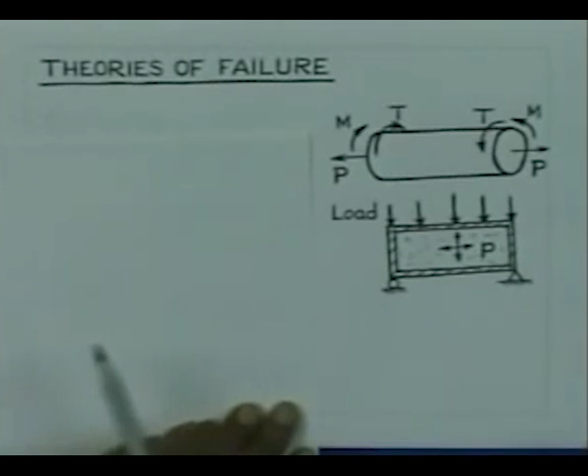It could be a shaft made out of some material, or it could be a pressure vessel made out of the same material. The shaft may be loaded by axial force, it may be also loaded by bending moment, torsion, and when these loads are acting, there will be some point in the material which is most critically loaded. The condition at which the material will fail is given by the theory of failure.

Similarly, in the second case, the pressure vessel is loaded by some internal pressure and it is also supported like a simply supported beam, and there are some transverse loading. Under the action of these, there is going to be a point in the body which is most critically loaded, and that critical condition will lead to failure of this component.

These theories help you to find out the load or the combination of load that will cause failure of the component. So, therefore, it is very important from the point of view of design. In the design of a component like this, you would be interested in finding out the combination of the axial load, bending moment and torsion which will cause failure of this component, so that you can guard against the failure by keeping the load level below those critical state.

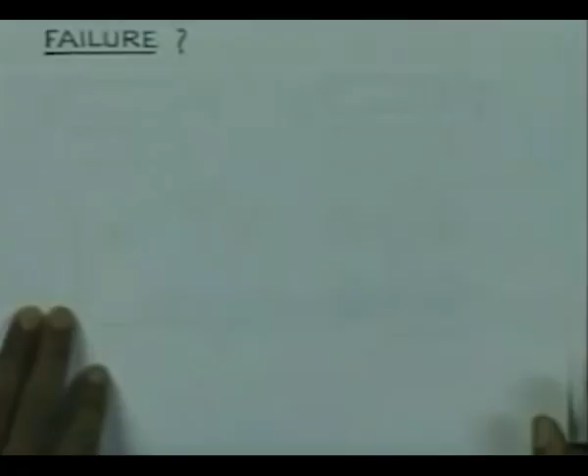Now, let us try to look into what is a failure. Think of a component which is loaded in tension. If the load is applied gradually, it may lead to a state when it will break into two parts. This could be a state of failure.

Think of another situation wherein we have a component which is loaded, and under the action of the loading, or as we increase the loading gradually, there is going to be more deformation. And suppose we have loaded it such that the plastic deformation occurs. On unloading, what you are going to find is that there will be some residual deformation.

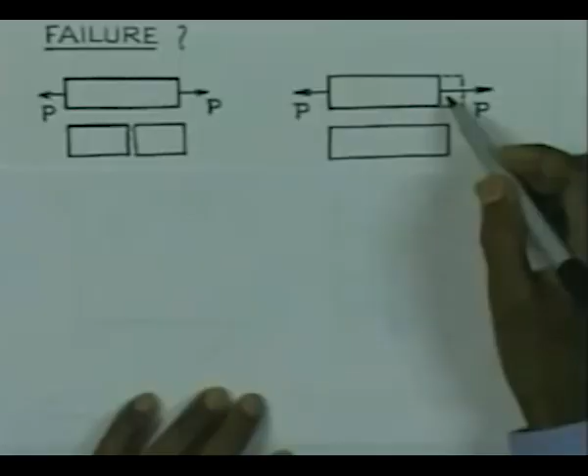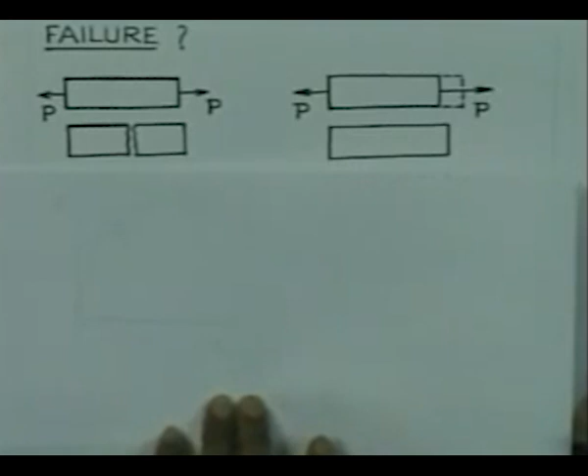So, look at this diagram again. You have this original length. So, after the removal of the load, the component has now got a length which is more than the original length. So, therefore, the component got permanently deformed.

This may be difficult, this may not be acceptable for some situations. Let me give one example here. Think of this case. Herein we have two shafts which are coupled together by means of a pair of gears. This is the pinion and this is the gear.

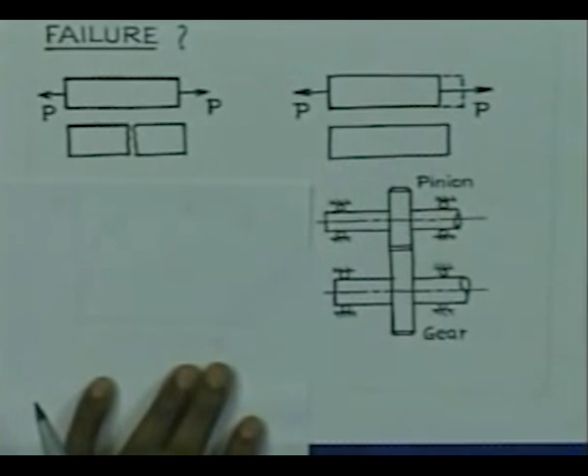While the shaft or the gears are transmitting power, there could be a situation that the radial loading, which tries to separate the two mating elements, if it is very high, there is a possibility that the axis of the shaft can get deformed.

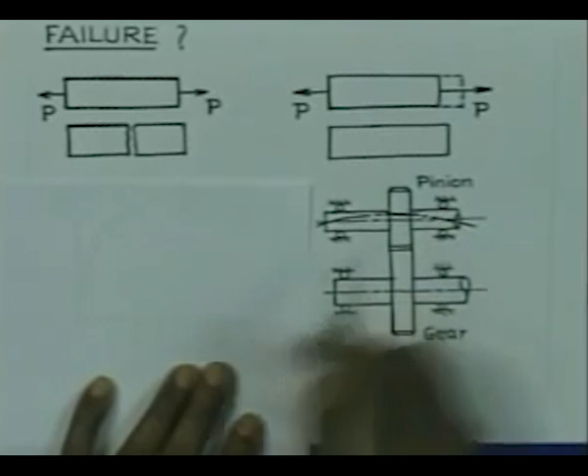For example, we find that after the load is removed, the axis of the shaft got deformed from the straight geometry to a geometry like this. So, therefore, now the mating of the pinion and the gear will not be perfect, and hence the subsequent operation will be noisy. So, this is not acceptable. So, therefore, we cannot allow in this case permanent deformation to take place.

In general, for the design of machines, we would like to guard against this condition. So, therefore, we would not permit any permanent deformation to take place in the component.

If you look into the tensile stress strain diagram of a material, typically you can think of plotting the engineering stress versus engineering strain. As you load, gradually the stress will vary linearly with the strain, and then after some time nonlinearity will set in.

Subsequently, we will have a point here which is the yield point, at which the material will try to deform permanently, and the load will increase with deformation up to the ultimate limit, and then it will finally lead to fracture at this point, which is the fracture stress.

So, the separation will take place corresponding to that stress, and in fact, there is this maximum stress which is the ultimate stress, that is the maximum stress that the component has withstood, and at this point itself the failure has initiated, and finally it fails into two components at this stress level.

So, therefore, we can take this to be the critical load for failure. So, this failure corresponds to this case.

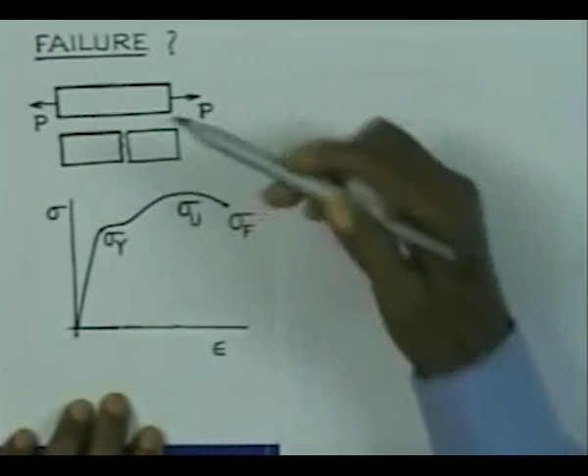But when we are trying to think of permanent deformation to be prevented, like the shaft example here, we are trying to refer to this point, that we will not allow the stress or the strain at this point to go beyond this point. So, for our discussion here, we would like to say that the failure of the material here will correspond to permanent deformation setting in, or the yielding of the material setting in.

Now, what is the utility of the theory of failures? Let us just try to look into this point.

The component that we were considering earlier, think of this component, herein it is subjected to axial load, bending moment and torsion.

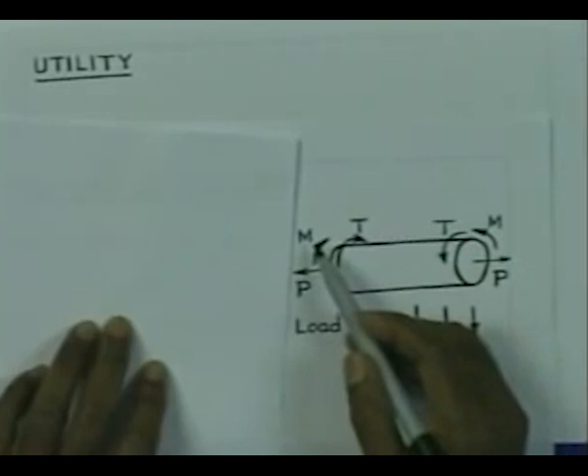If it is subjected to axial load, one would like to know what is the load that the component will withstand, given the cross sectional area and its dimension. Or one may be interested in finding out the bending moment given the dimensions, or what is the torque that can be withstood by the element given the dimensions.

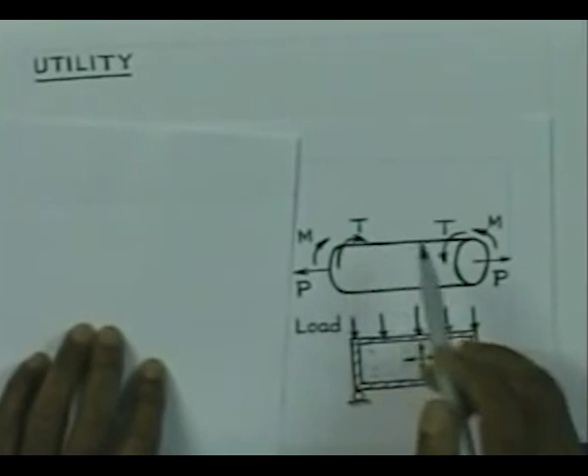Or it could be a situation wherein all the three are acting together, and we would be interested in what combination of the three will cause failure of the component or will initiate permanent deformation at the most critical point. So, therefore, these theories of failure, they help in finding out the load capacity of a component.

That load capacity can be referred to a single load, or it can be referred to a combination of loading.

There is also another point which is resolved by the theories of failures. I would like to show you this. When you try to pull a specimen in a tensile testing machine, particularly you have the experience when we test the mild steel specimen or aluminum specimen.

At the point of failure, that means when the component has got broken down into two pieces, there is a typical cup and cone fracture. So, I would like to show this.

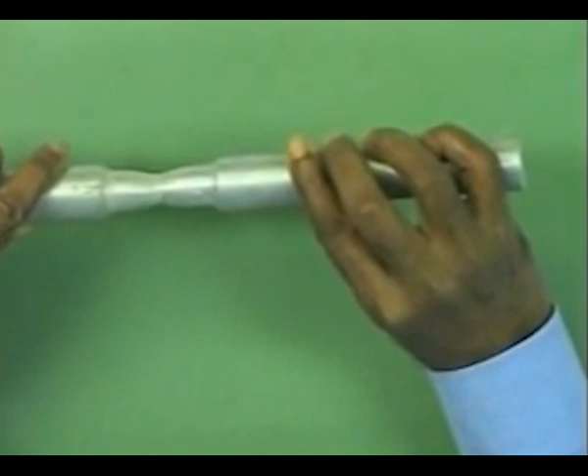Think of this specimen. This was the specimen which was tested in the tensile testing machine, and this was the gauge length of the specimen between this point and this point, and as we pulled it, it necked and then finally it failed into a typical cup and cone fracture.

You can see here that on this side you have the formation of the cup, and on this side you have the formation of the cone. In this case, the central portion has failed perpendicular to the direction of the loading, and the outer portion has failed at an angle of 45 degrees to the direction of loading. The question is, why does it happen that way?

Similarly, let us consider the example of a chalk.

If we take a piece of chalk and pull it, this has failed perpendicular to the loading direction and the cross section is flat after the failure. You can see that you can join the two sides together to get almost the original geometry. So in this case the chalk has failed in the cross sectional direction. This is the observation when you pull the chalk in tension.

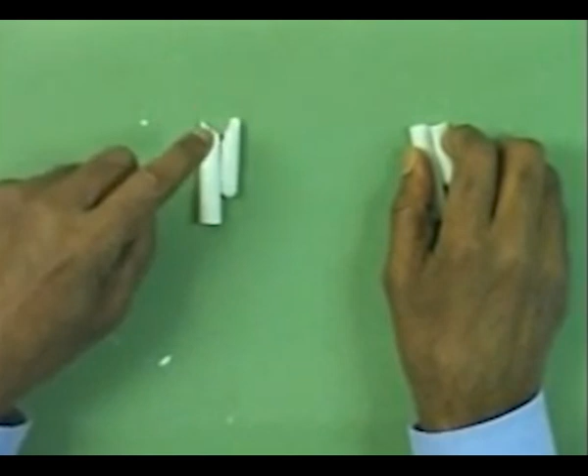Now let us consider another loading. We take the same chalk piece and we would now like to twist it. If I apply the twisting, you see that it has failed at a helix angle, it has failed in the helix direction, and this angle is 45 degrees. Now the chalk is made up of the same material. Under the action of the loading, we see a failure which is different from this failure which has resulted from application of the torque.

How can we explain this? Does it mean that the two loadings gave rise to two different failures? Physically they are different, but is there a commonness in the condition that existed in the two cases that has led to the failures? I would like to repeat this. We have tried to apply tension loading on the chalk and torsion loading on the chalk, and the failure in the two cases are different, but does that mean the condition at the root of the failure is different? That is the question. In fact, we would see that although the two loadings are different and the two failures are seemingly different, there is a condition which is same in both cases which has led to the failure.

So these theories of failure help us to find out the unity in the condition of failure in the two cases like this. And in fact, if there are multiplicity of loading, then also these theories of failure help us to find out the commonness of the condition of failure.

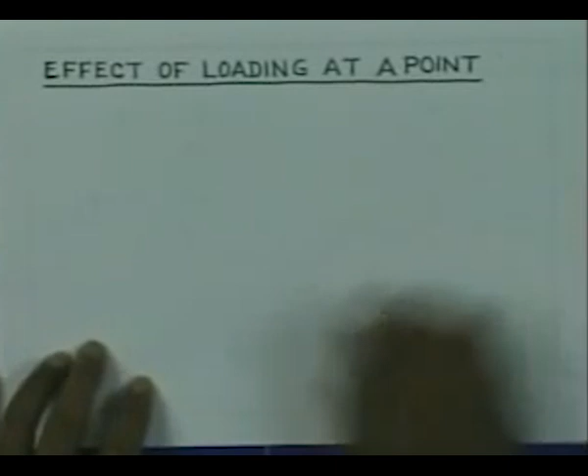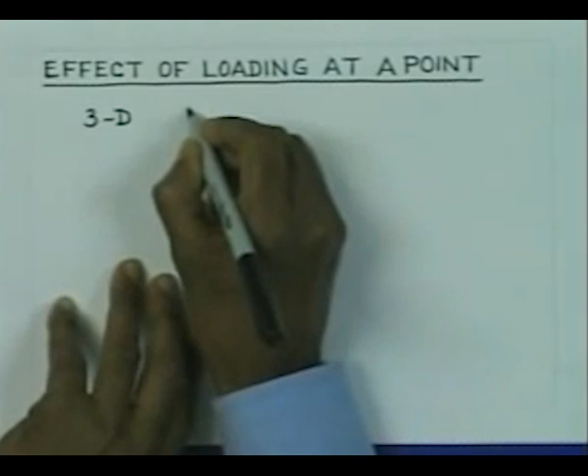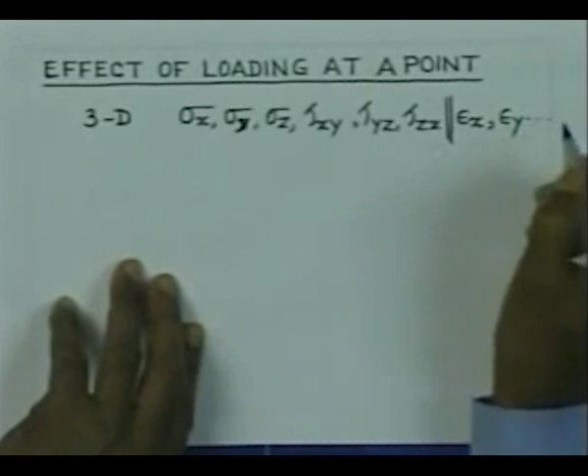If you consider a three dimensional situation, in 3D we can express the condition of state of loading at a point by the 6 components of stresses or 6 components of strain. So we can certainly express the condition of loading at a point by the 6 components of stresses. Alternatively, we can also express it by the 6 components of strain: epsilon x, epsilon y, and all the other components. The same state of stress or strain we can express in terms of the 3 principal stresses, and here we can give it by the 3 principal strains epsilon 1, epsilon 2, and epsilon 3.

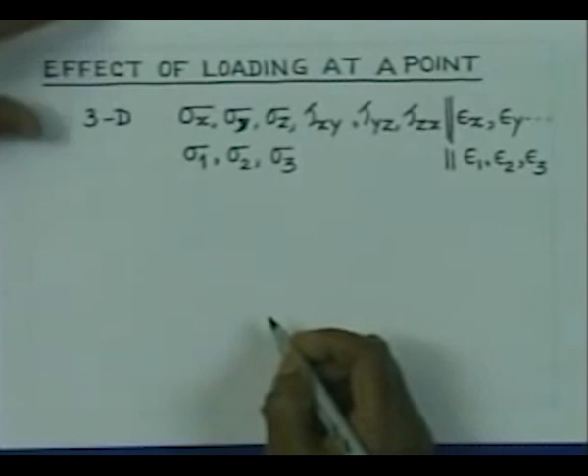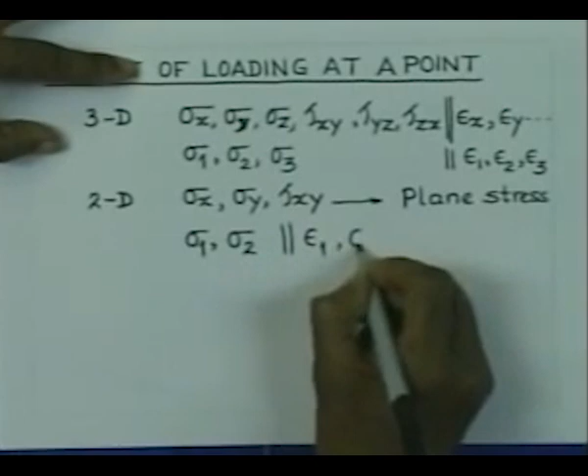In 2 dimensions we can give it in terms of sigma x, sigma y, and tau xy. I would rather confine my discussion here to plane stress. So for plane stress we will have these 3 components. Alternatively, we can express the condition of loading at a point by the 2 stresses or the strains epsilon 1, epsilon 2.

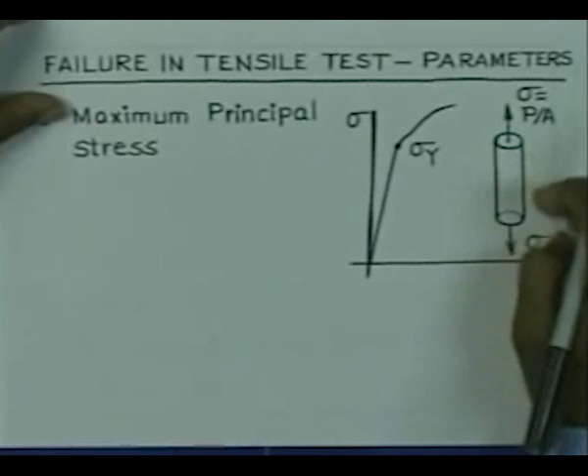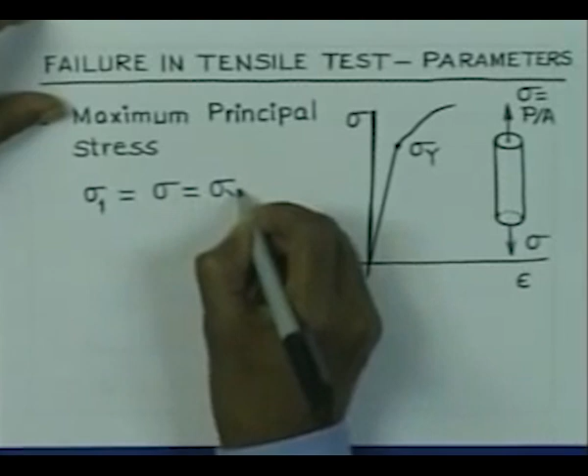Let us look into the failure of materials in tensile testing. If we consider the specimen to be loaded like this, and if we plot the stress strain, as I mentioned, this is how the stress will vary with strain, and at some point the material will demonstrate the yield stress. The condition of loading which corresponds to this point is nothing but a case of one dimensional loading, so only one stress is acting here. Therefore, the condition of failure at the point of yielding is sigma 1 equal to sigma, and that is equal to sigma y. That is the condition of failure here.

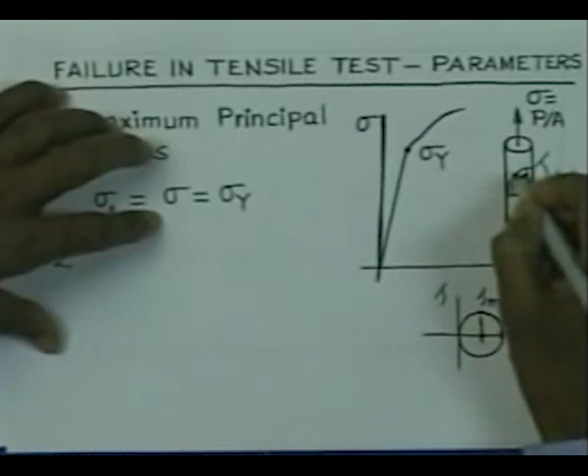If we try to consider the maximum shear stress which develops because of this loading, you remember that in the case of uniaxial loading, the maximum shear stress occurs on a 45-degree plane. So this is the plane which is at an angle of 45 degrees. On this plane there is a shear stress acting, that is the maximum shear stress. This follows from the Mohr circle diagram. If you draw the Mohr circle diagram, you have the shear stress in the y direction, normal stress in the x direction, and your stress here - let us say that is the yield stress. If we draw the Mohr circle, this is the Mohr circle for this case, and the maximum shear stress corresponds to this point, and that maximum shear stress is nothing but sigma y by 2, and it acts at an angle of 45 degrees to the uniaxial loading direction. So the maximum shear stress, tau maximum, is equal to sigma y by 2.

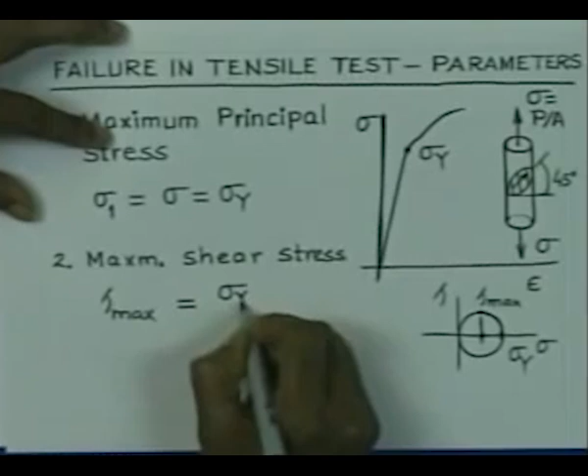Now, what is the principal strain in this case? Since there is only one directional loading or one stress present here, the maximum principal strain corresponding to this loading is nothing but sigma y by E, where E is the Young's modulus. Approximately consider that it is linear up to the yield point, so therefore maximum principal strain in this case is sigma y by E.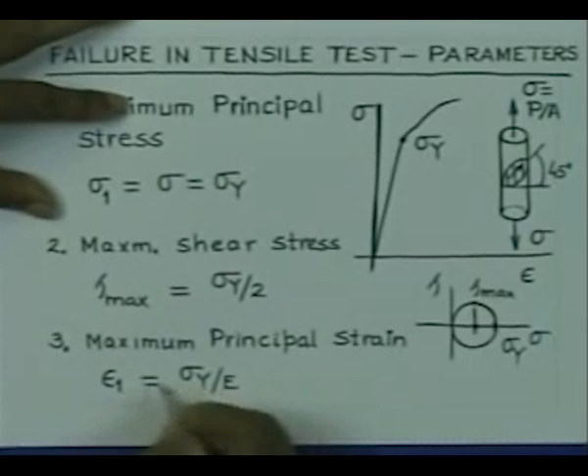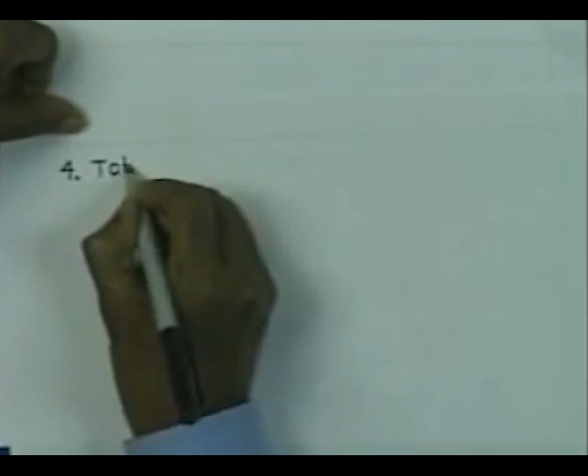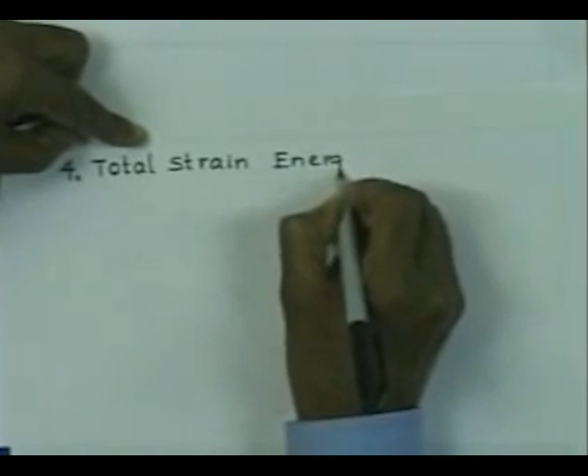At the same point of failure, if you calculate the total strain energy density, that is represented by S, is nothing but sigma y square by 2E. That is the energy per unit volume in the material at the yield point.

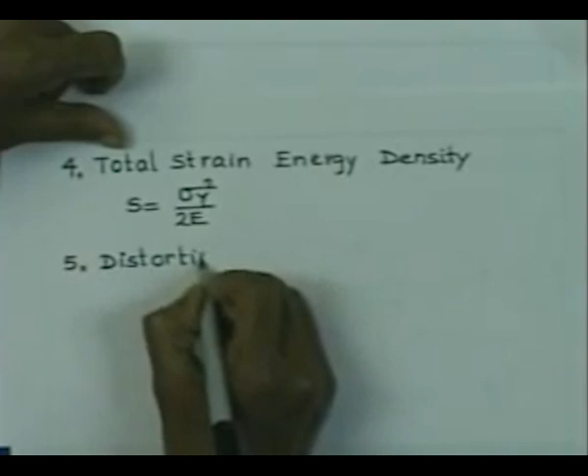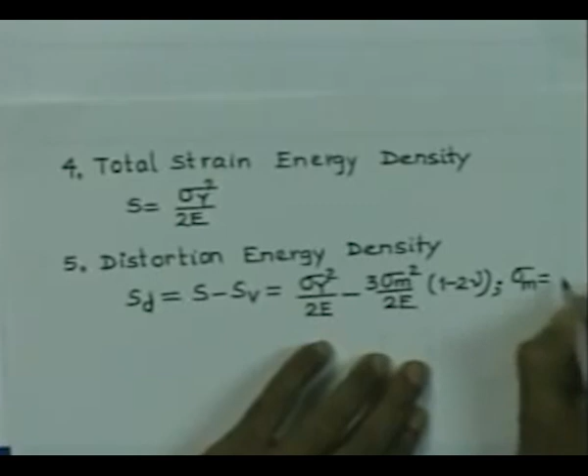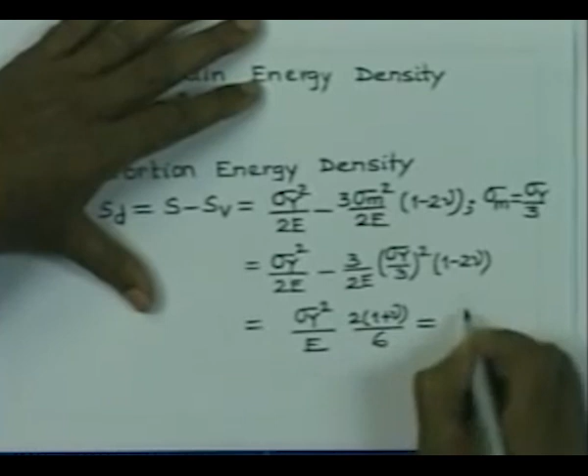If you calculate the distortion energy density, represented by SD, it is equal to total strain energy density minus the volumetric strain energy density. Total strain energy density is sigma y square by 2E, and the volumetric energy density is 3 times mean stress square divided by 2E multiplied by 1 minus 2 nu, where since it is uniaxial loading, the mean stress is the sum of the 3 stresses, which is sigma y, and mean stress is the average of that, so it is sigma y by 3. If we do the simplification, this is equal to sigma y square by E into 2 into 1 plus nu by 6, and that turns out to be sigma y square by 6G.

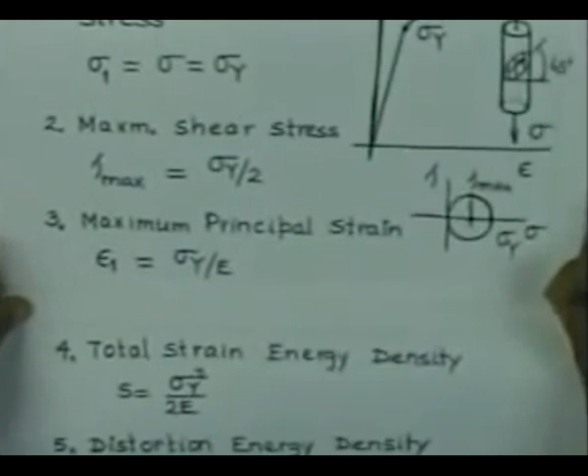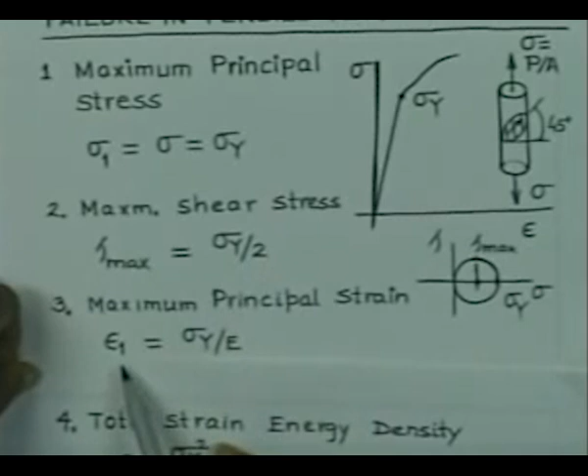So at the point of yield, what we have is that the material has a stress state given by sigma 1 equal to sigma y, maximum shear stress is sigma y by 2, maximum principal strain is sigma y by E, the total strain energy density is sigma y square by 2E, and the distortion energy density is sigma y square by 6G.

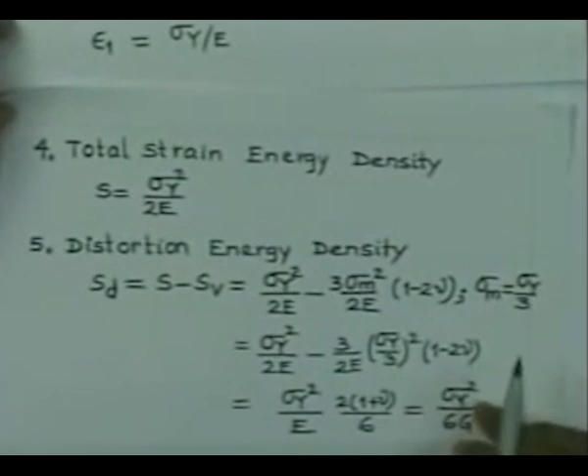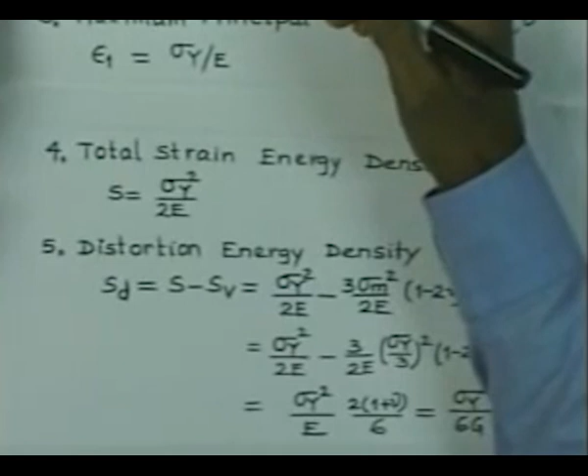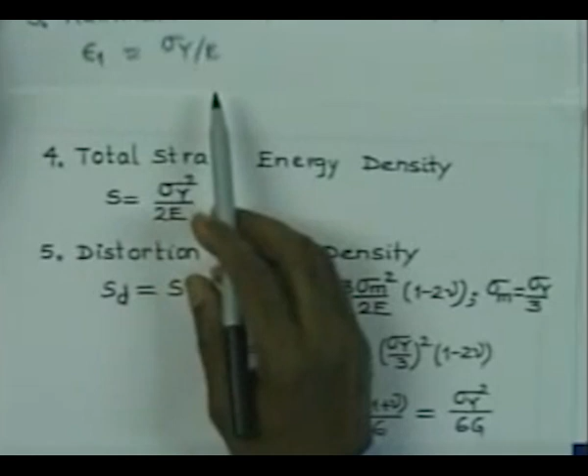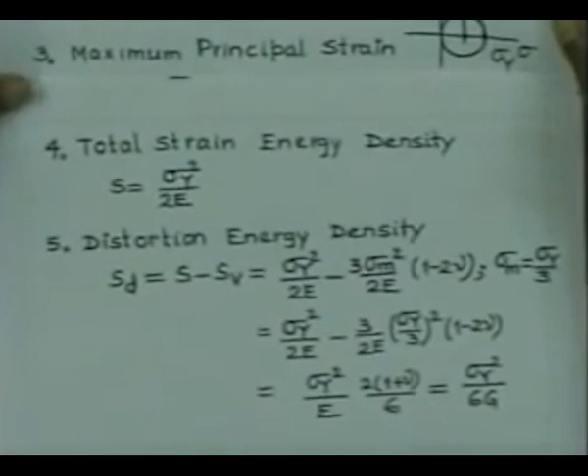Here one can say that the yielding of the material has been due to the attainment of the maximum principal stress level sigma y, or the maximum shear stress reaching the value sigma y by 2, the maximum principal strain reaching the value sigma y by E, the total energy density reaching the value sigma y square by 2E, or the distortion energy density reaching the value sigma y square by 6G. So therefore one can explain the yielding phenomena to be associated with either a critical level of stress, strain, or energy density, and this is the basis of different theories.

In fact, keeping these as the basis, there are 5 important theories of failure or criteria of failure. They are: maximum principal stress criterion, proposed by Rankine; maximum shear stress criterion, proposed by Tresca; maximum principal strain criterion, proposed by Saint Venant; maximum strain energy density criterion, due to Haigh, also associated with the name of Beltrami; and maximum distortion energy density criterion, due to von Mises, also associated with the name Huber and Hencky.

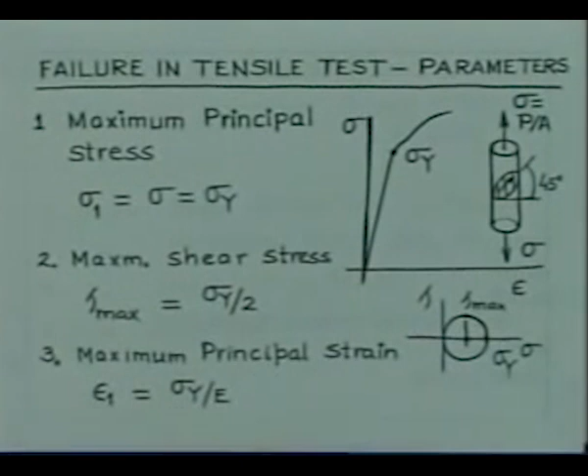Herein we would like to consider this criterion to be given by von Mises. Why is that? We have to consider this theory. There is also another issue I must stress upon here: if we have to find out the load capacity of a component under complex loading, for example, we would get back to our first example here.

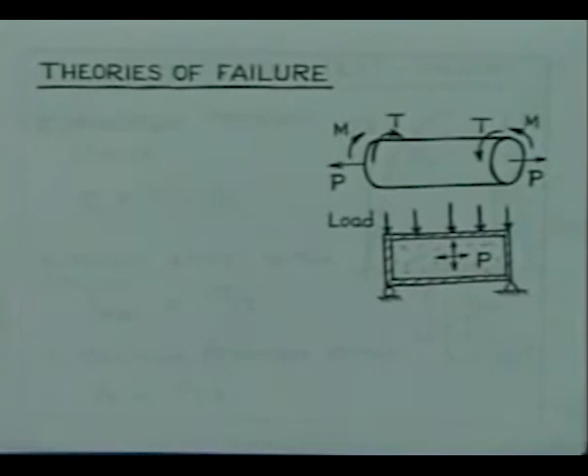So in this case, if we have to find out the axial load capacity alone, then we can do testing. Similarly, if we have to find out the bending capacity, we can do the testing by applying bending load. Similarly, if we are interested in finding out the torsion capacity, we can apply the torsion load and find out the load capacity. This means that if we have a component subjected to varieties of loading, in each case it will be necessary to do the test and find out the loading.

That is not really a rational way of going about it. On the other hand, if we can do one test, for example the tensile test, and find out the capacity of the material, and the observations from that test can be used to find out the bending load capacity or torsion load capacity, then that is a rational way of going about it. In fact, theories of failure do help us in achieving that. So we try to do a single test, collect the material data, and using that data find out the load capacity in new situations, without needing to test in each and every case.

Before we take up examples of these theories, let us brush up some of the relationships we derived in our initial stages.

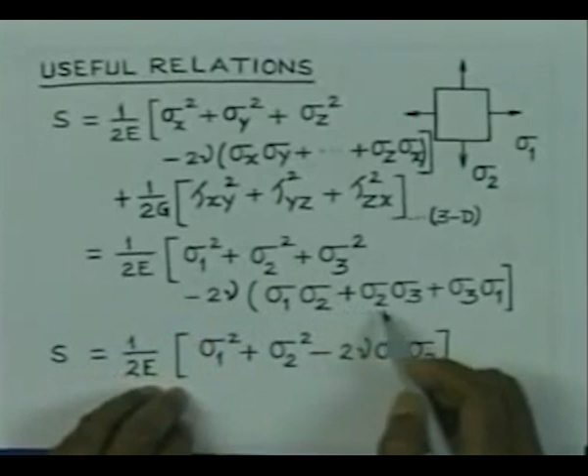For a 3-dimensional problem, the total strain energy density can be given in terms of the 6 stress tensor components: 1 by 2E times sigma x square plus sigma y square plus sigma z square, minus 2 nu times sigma x sigma y plus sigma y sigma z plus sigma z sigma x, plus 1 by 2G times tau xy square plus tau yz square plus tau zx square. If we write the same relationship in terms of principal stresses, it becomes simpler: 1 by 2E times sigma 1 square plus sigma 2 square plus sigma 3 square, minus 2 nu times sigma 1 sigma 2 plus sigma 2 sigma 3 plus sigma 3 sigma 1.

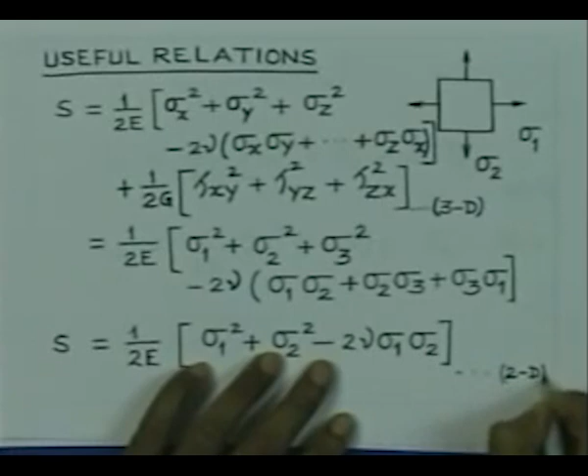In the case of 2 dimensions, we will have sigma 3 equal to 0, so the total strain energy density becomes 1 by 2E times sigma 1 square plus sigma 2 square, minus 2 nu sigma 1 sigma 2. I would again emphasize that in my discussion I confine to plane stress condition; we are not talking about plane strain, where a third stress component can be present.

Similarly, the distortion energy density is given by 1 by 12G times sigma 1 minus sigma 2 whole square plus sigma 2 minus sigma 3 whole square plus sigma 3 minus sigma 1 whole square, for 3 dimensions. The same expression for 2 dimensions is 1 by 6G times sigma 1 square plus sigma 2 square minus sigma 1 sigma 2. The volumetric strain energy density is given by 3 by 2E times sigma m square into 1 minus 2 nu, where sigma m is the average of the 3 normal stress components.

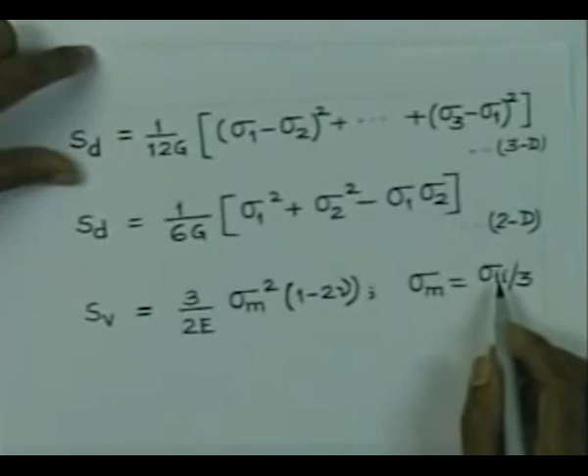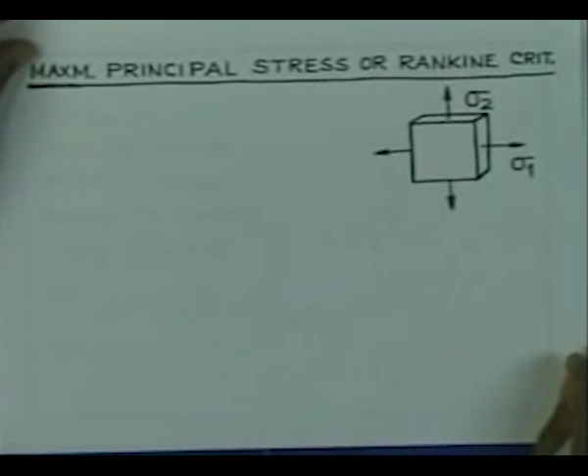Let us consider the maximum principal stress, or Rankine criterion. We consider the situation to be plane stress. If we consider the most critically loaded point in a component, let us represent the stress state as sigma 1 and sigma 2 acting in the two orthogonal directions.

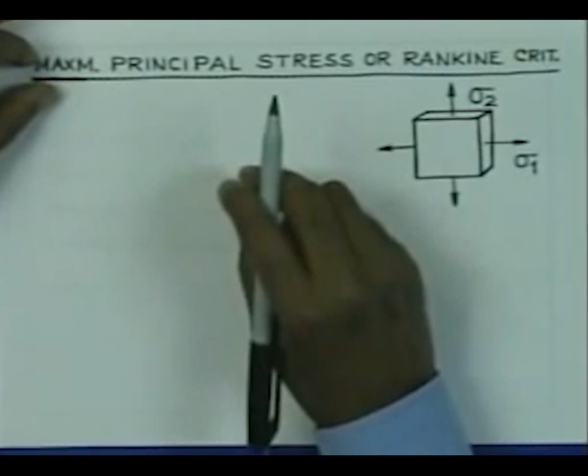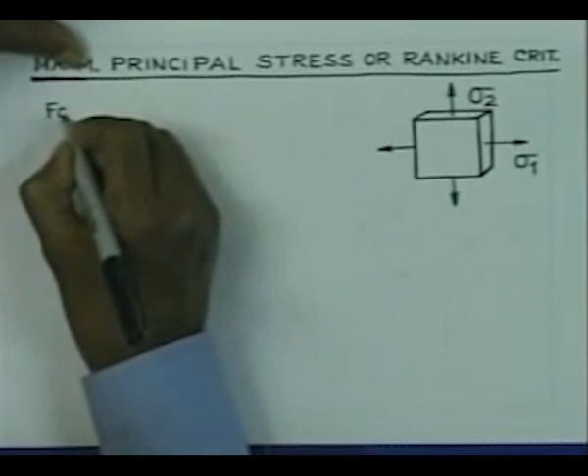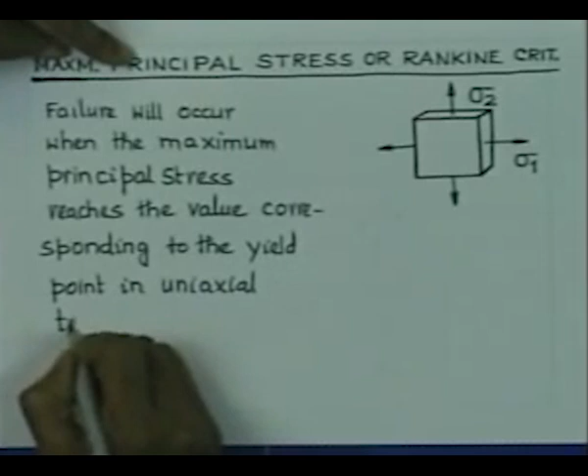According to this criterion, failure will occur when the maximum principal stress reaches the corresponding value in uniaxial tension, that is, when the maximum stress reaches the value corresponding to the yield point in uniaxial tension.

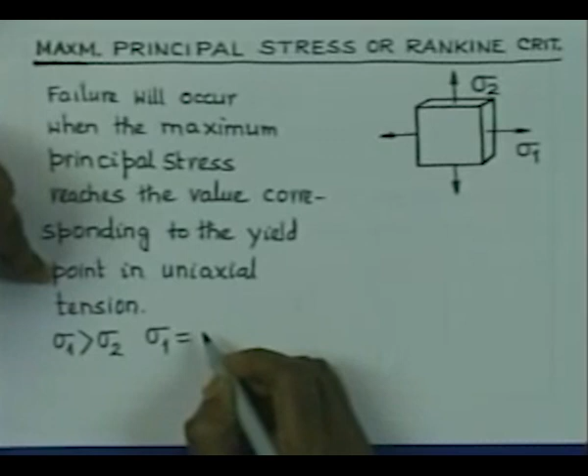Let us now consider that sigma 1 is greater than sigma 2. This means that failure will take place when sigma 1 is equal to the corresponding value in the uniaxial test at yield point. We know that the corresponding stress at yield point in uniaxial tensile test is sigma y, so this is the condition of failure.

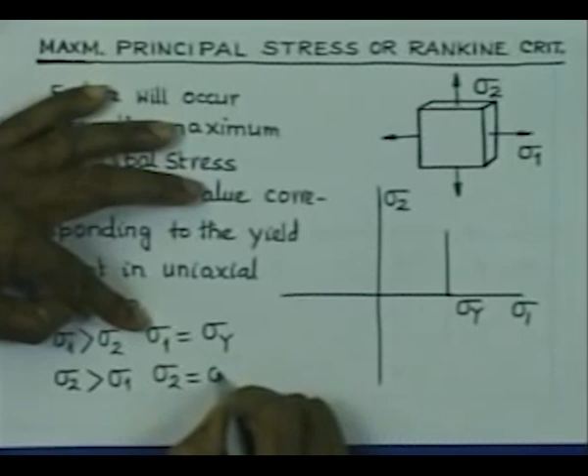Suppose sigma 2 is the larger stress than sigma 1, then failure will occur when sigma 2 is equal to sigma y. Since sigma 2 is larger, we again have failure here when sigma 2 equals sigma y. So this line gives the combination of sigma 1 and sigma 2 which will correspond to failure.

That means the stresses which are lying within this boundary are all safe combinations. So we can write that the stresses lying within this zone are all safe. So this is the safe zone, and the stresses which are outside this boundary correspond to the failure zone. The portion of the boundary which separates the safe zone from the failure zone is known as the failure locus.

Generally, we consider the property of the material to be the same in tension and compression. Therefore, we can now also find out the safe zone and the failure zone in the compressive region, and it is going to be without any difficulty that we can find this out.

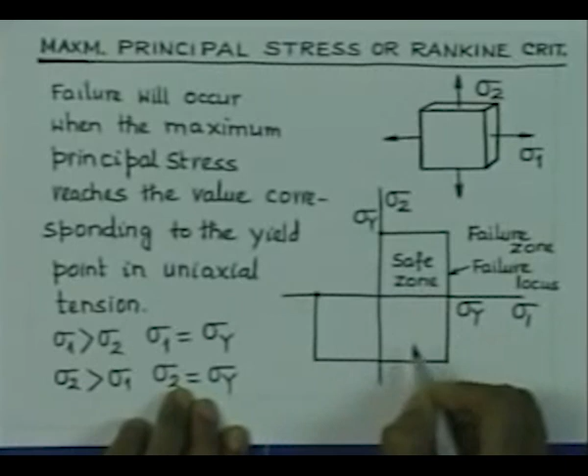If one of the stresses is positive and the other is negative, again we will have the zone given by these two lines, and in the other quadrant also the zone is going to be given by this line. So the total space in 2 dimensions corresponding to the safe zone is nothing but this.

So these are the stresses which correspond to safety, and the stresses outside this correspond to failure. So this is sigma y, this is sigma y, and of course this is compressive sigma y. So this is how the failure zone can be found out making use of the maximum principal stress criterion, or Rankine criterion.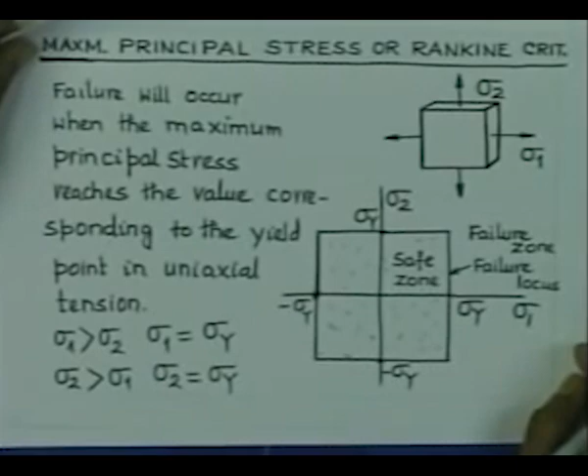Now we will like to consider the maximum shear stress, or Tresca criterion. According to this criterion, the failure will occur when the maximum shear stress in the material reaches the value corresponding to the value at the yield point in a uniaxial tension test.

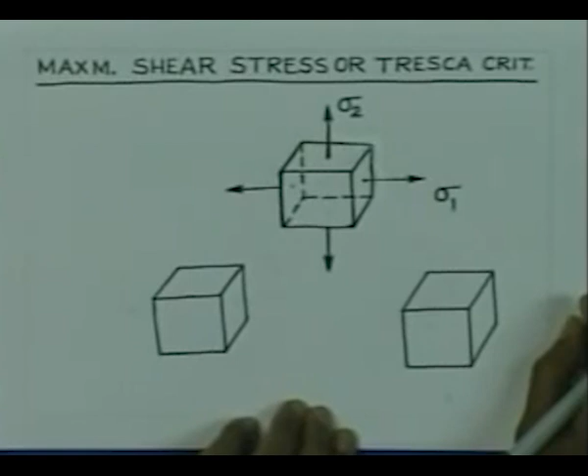Before we go into giving the theory, let us consider some points here. Think of this element which is loaded by biaxial loading, sigma 1 and sigma 2. If we find out the maximum shear stress, that shear stress is going to occur on this 45-degree plane. This is one 45-degree plane, and the other 45-degree plane is given by joining this with this edge, so it is this one, if it is a perfect square.

So this is the maximum shear stress plane, and the magnitude of the shear stress is nothing but sigma 1 minus sigma 2 by 2, provided sigma 1 is greater than sigma 2, and it can also be given by sigma 2 minus sigma 1 by 2, provided sigma 2 is greater than sigma 1.

Let us now consider a situation here. We have sigma 1 acting in this direction, sigma 2 acting in that direction, and in the third direction, if you consider this as your x direction and this as the y direction, in the z direction the stress is 0. What I mean is that in this direction we have the stress sigma 1 acting, and the stress in this direction, which is sigma 3, is 0 because we are considering the plane stress condition.

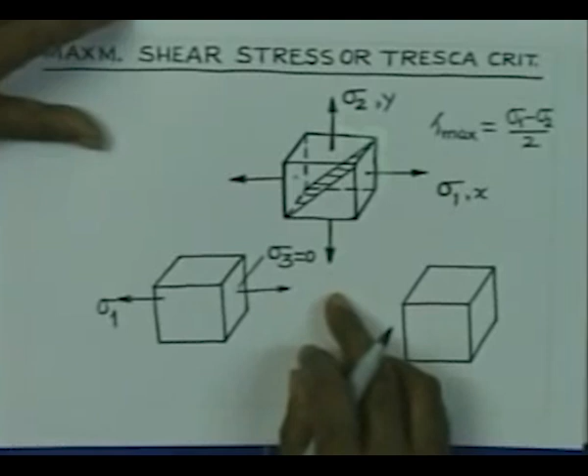Because of this stress sigma 1, we are going to get maximum shear stress, and that maximum shear stress is going to occur on a 45-degree plane which is inclined at an angle of 45 degrees to these two axes, sigma 1 and sigma 3. So this 45-degree plane could be the plane like this. Let me draw this. The plane which is making an angle of 45 degrees to both sigma 1 and sigma 3 direction is nothing but this one. It could also mean the plane which is here.

This could also mean this 45-degree plane. So these are the planes, this is one and this is the second plane on which the shear stress will be maximum, and the maximum shear stress here is nothing but sigma 1 by 2.

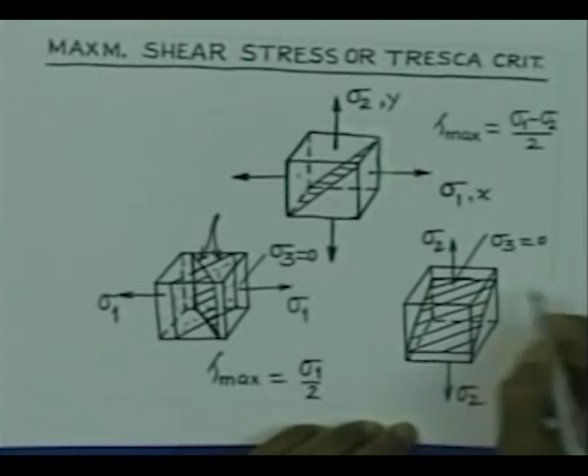So this is the 45 degree plane, and on this plane we are going to get tau maximum equal to sigma 2 by 2.

So you find here that in the case of two dimensional loading, we are likely to get three maximum shear stresses: one coming up because of the loading in sigma 1 and sigma 2 plane, with value sigma 1 minus sigma 2 by 2; due to sigma 1 and sigma 3 we will have maximum stress sigma 1 by 2; and due to the loading in the plane sigma 2 sigma 3 we will have maximum stress sigma 2 by 2.

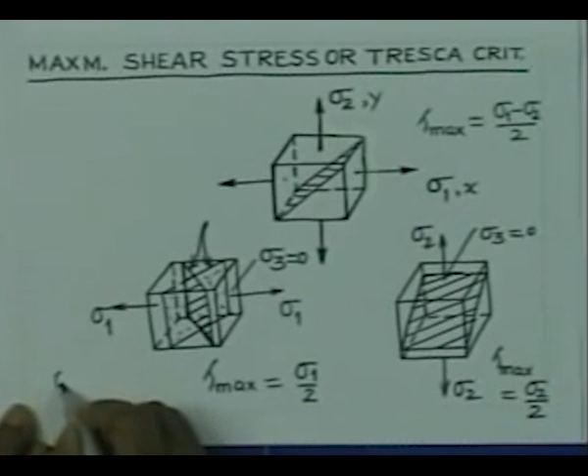Note that if sigma 2 is positive, or both sigma 1 and sigma 2 are positive, then we are going to get the highest stress given by sigma 1 by 2. If we also assume that both sigma 1 and sigma 2 are positive and sigma 1 is greater than sigma 2, then this becomes a stress which is not the highest; this is the stress which is highest.

According to this maximum shear stress theory, the failure is going to occur when the maximum shear stress reaches the value corresponding to the value at the yield point in uniaxial tension. So we can now find out the failure zone as per this theory.

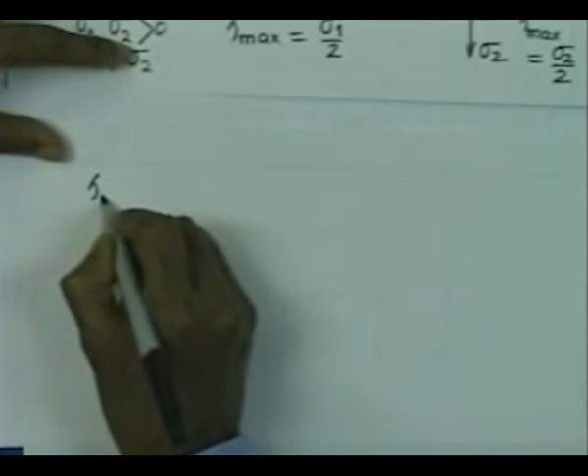If we consider now the maximum shear stress is given by sigma 1 by 2, provided we have sigma 1 greater than sigma 2 and it is greater than 0, and the condition of failure is that this tau maximum reaches a value equal to sigma y by 2, and therefore sigma 1 is equal to sigma y, that is the condition of failure.

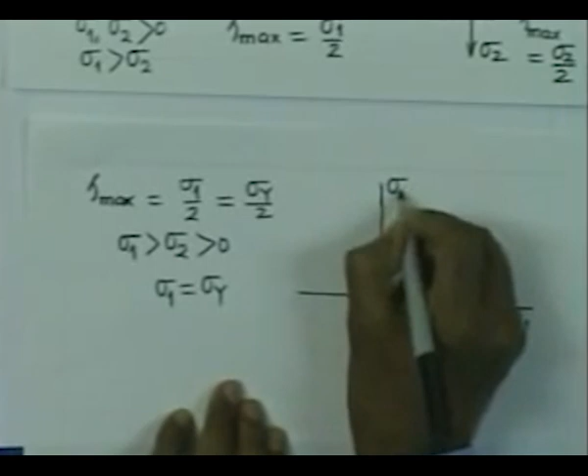So if you now try to plot it in the stress space sigma 1 and sigma 2, what we find is that we will have this level given by sigma y. So whenever the sigma 1 stress reaches the value sigma y, we are going to have the failure.

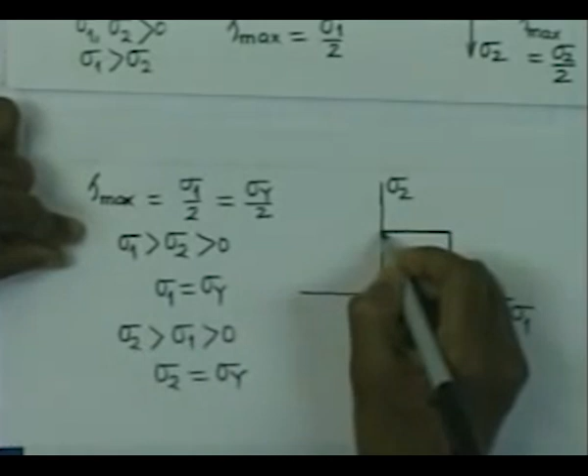If we have sigma 2 greater than sigma 1 and both are positive, then the failure is going to be given by sigma 2 equal to sigma y, because the maximum shear stress is sigma 2 by 2, and that is equal to sigma y by 2, which simplifies to sigma 2 equal to sigma y. So therefore we will have the combination of stresses that will cause failure given by this line, and this distance as usual is given by sigma y.

Similarly, in the compressive region, if we have the sigma 1 stress greater than sigma 2, then the failure is going to be given by the line which is at a distance of minus sigma y from the origin. Similarly, if sigma 2 is dominating, then the failure is going to be given by sigma 2 stress which is at a level of minus sigma y.

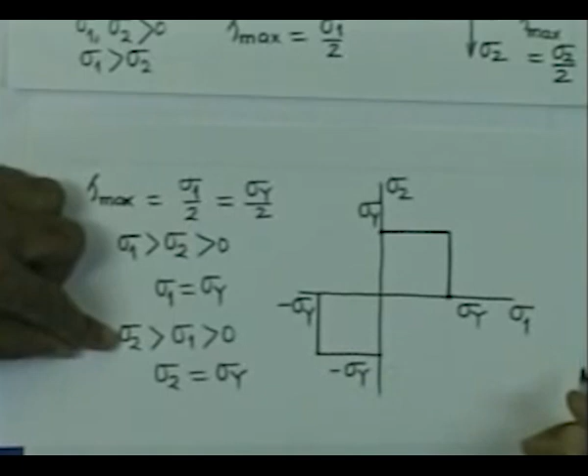Now, if sigma 1 is positive and sigma 2 is negative, then the maximum shear stress is going to be given by this expression: sigma 1 minus sigma 2 by 2 equal to sigma y by 2, and therefore this boils down to sigma 2 equal to sigma 1 minus sigma y. So this is a straight line which is at an angle of 45 degree.

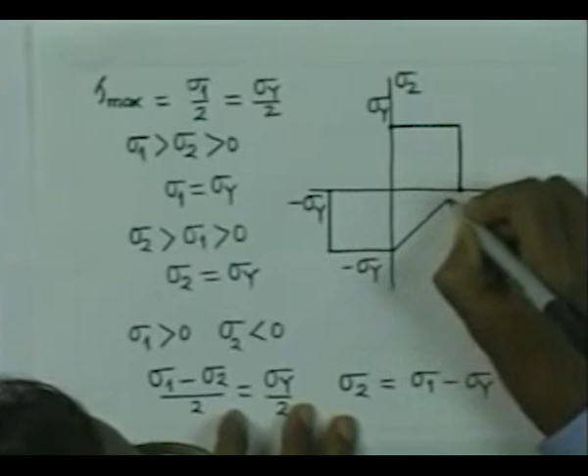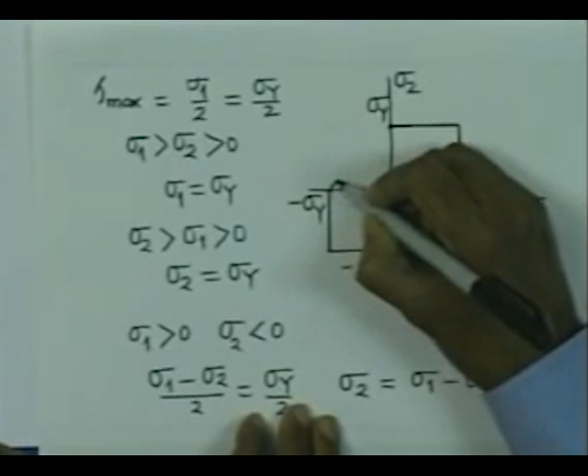So we are talking of this zone wherein sigma 1 is positive and sigma 2 is negative, and therefore the straight line is going to be again given by this straight line. So all the combination of sigma 1 and sigma 2 which will cause failure is given by this line. By similar considerations, when sigma 2 is positive and sigma 1 is negative, you will find that the combination of stress which is going to cause failure is given by this line.

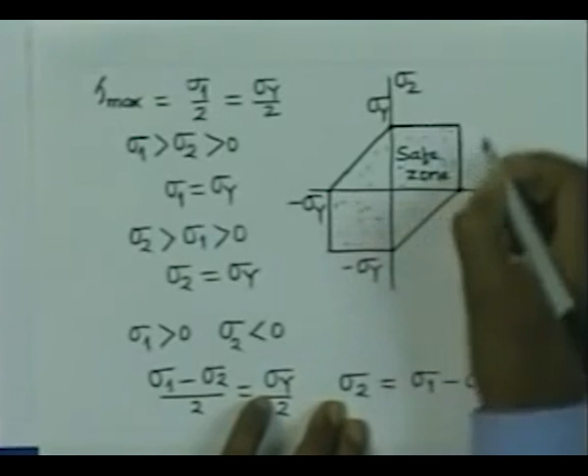So therefore this zone, which is a hexagon, separates the safe combination of stresses from the unsafe combination of stresses. So this is the safe zone, and outside is the failure zone, and this boundary is the failure locus.

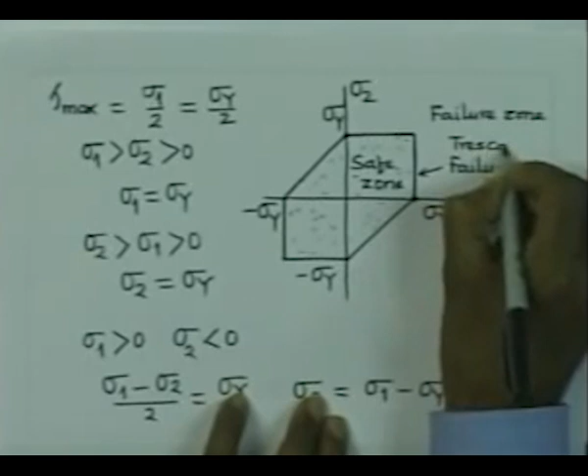And this is due to Tresca, so it is the Tresca failure locus. So by using this Tresca criterion, you can find out all the combinations of stresses that are going to be safe.